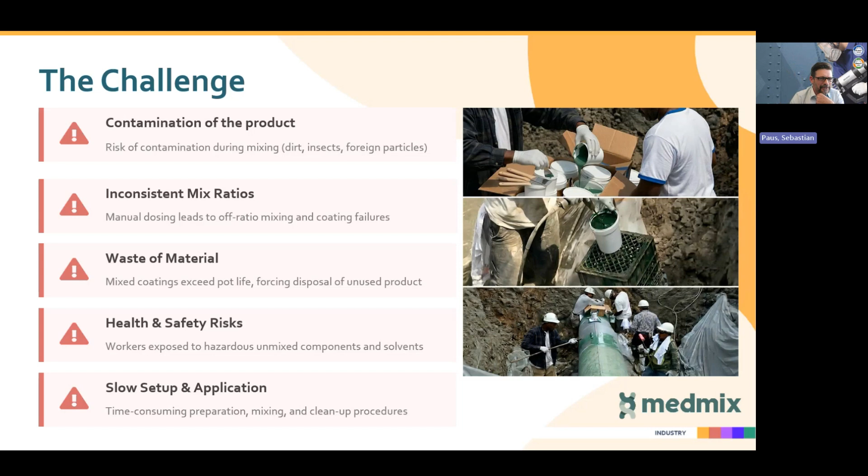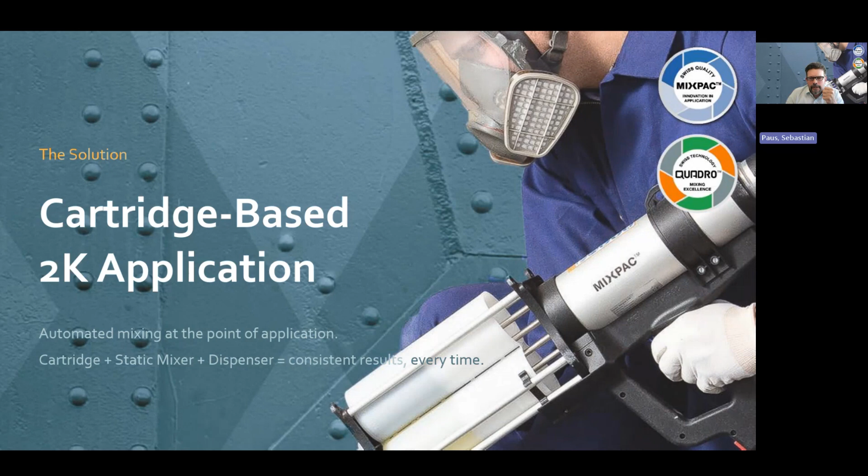So we faced the challenge, and now we are going to the cartridge-based two-component application systems that we provide. The first thing I would like to do is show you what the main applications in the pipeline industry are right now. So we've seen that weld joints are the number one application in the pipeline industry. Why is a weld joint such a predominant or such a good application for our system?

You can place the cartridges needed for the joint on the joint, access it only with a small vehicle with a compressor on it, spray the coating, and then go to the next joint. So here it is a perfect match for the system that we've generated.

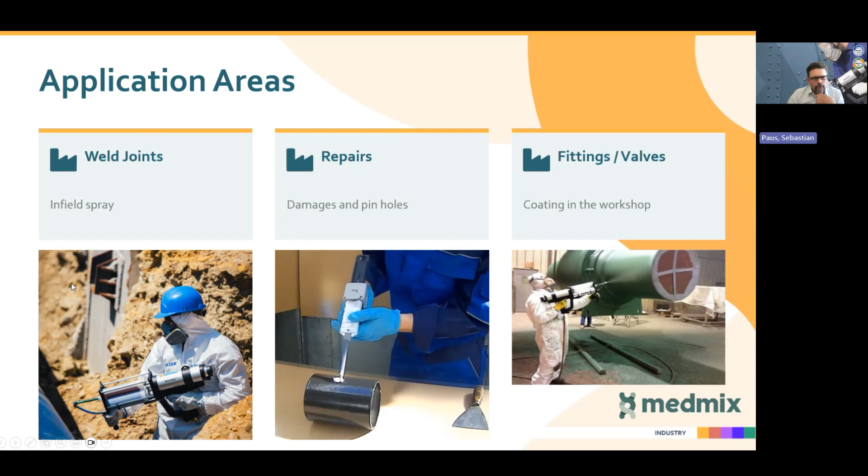Now, a short introduction, like a theoretical introduction into how our systems work. It is very, very well known in the world of adhesives, and I've seen a lot of people that are actually very, very well trained in adhesive on these kind of systems. In the coatings, it's not that well known. It's not a standard application system.

So literally what you do is you prepare your cartridge. In some cases, you need to shake it up. In some cases, you need to heat it, specifically in the pipeline business, as we are talking thick film coatings. And then you attach the mixer. You put the cartridge and the mixer into the dispenser. You need to purge the mixer to assure that the mix is uniform, and then you can start spraying.

After spraying, cartridge and mixer are contaminated with coatings. There's a little residual coating in the cartridge. This is going to be disposed. The main advantage of disposing this is you don't have the effort of cleaning anything.

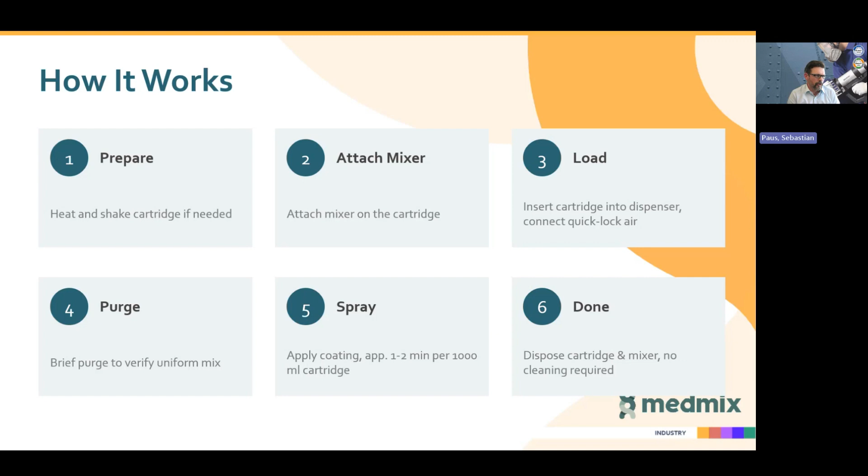So literally, after you are finished, you take the cartridge out of the dispenser, put it into the waste, and you are done. And this is also a very big advantage because you don't need to clean any tools that are being used throughout the process of mixing or application.

Now we're shortly looking at the main tools that we supply into the business, which is on the left-hand side, the spray dispenser. This is a handheld dispenser that holds all the ratios of cartridges available. It is like a standard spray gun. It has a dual stage trigger.

So if you pull the trigger in half, the atomization air will be activated. And if you pull the trigger full, the material flow starts. And this is a standard in spraying in the industry. This is why we've copied it, to give the applicator the feeling that he knows how the tool is operating.

Also, what is a great advantage is that you are handling the full device. You don't have a bigger unit that you need to transport to the location. You have your air hose. Obviously, you have the compressor, which is slightly bigger, but you have everything you need in your hand to spray. And this is very interesting.

For the pipeline, a lot of times you have to spray on top or below the pipe. For this specifically, we have mixers with 90-degree angles. Some customers really like these mixers for the top and the bottom of the pipeline. Some spray it with a straight one. I just wanted to point out the availability.

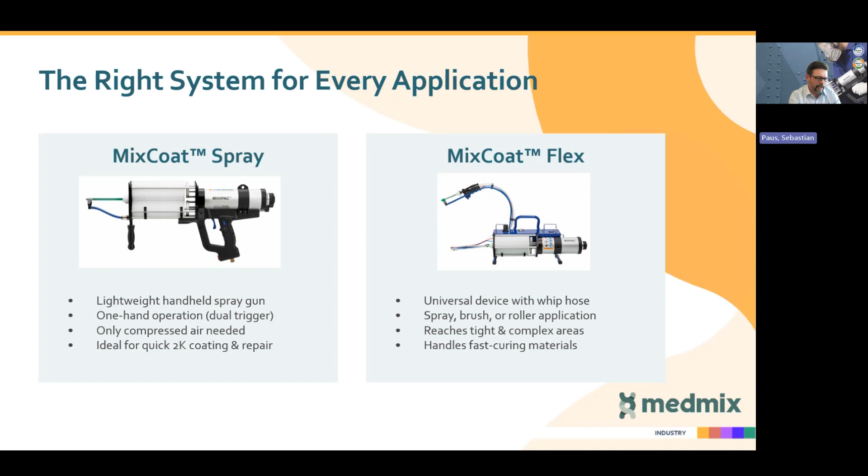Now we are going into the comparison. I made a small AI image on a cartridge and mixing in the field. So obviously you can see you have a very clean environment. You put the cartridge into the gun, you dispense, and you only have contact to ready mixed paint. And this is a crucial advantage.

You don't need to mix. You don't need to worry about mixing ratio or mixing quality. If the system is properly tested with the cartridges, it will work each and every time. The static mixer is one of the most reliable technical tools. So here, normally you don't find any difficulties in the use.

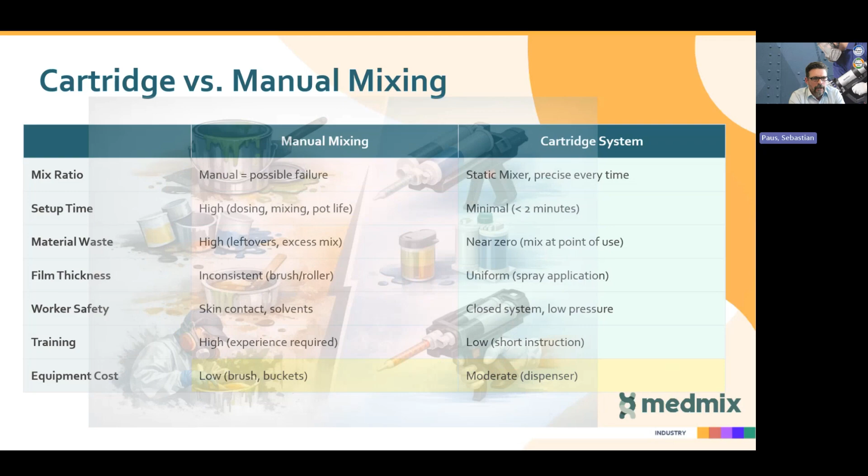Coming to the actual process, first of all, the mixing ratio. So if you pour one component into the other, it's always a manual process and there is a risk of failure. The mixing ratio is precise with the cartridge and the static mixer every time.

Setup time. So it's very easy to understand. You either put a cartridge into a dispenser, and on the other hand, you need to open a tin. You have to pre-mix the tin, the second one, pour the one into another. So we don't even have to think what is the quicker and better solution.

If you take a look at waste of materials, we've had that once already. Everything that is left over when pre-mixed is waste. And with a cartridge system, we mix at the point of application or the point of use. So there's a minimal waste, and this is the residual material inside of the mixer itself.

Film thicknesses. If you manually premix, you brush and roll the material on, it is much more difficult to achieve a consistent layer thickness when rolling or brushing. It is very uniform if you have a spray application. So here also the advantage is clearly on the cartridge side.

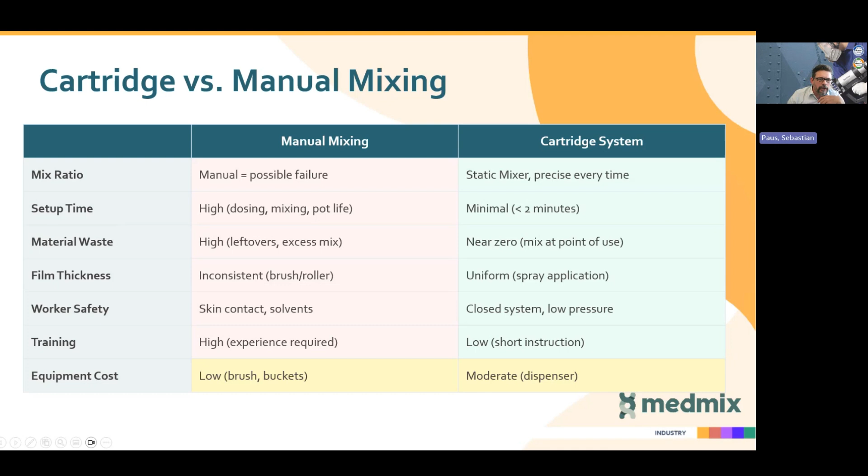Let's take a look at the reliability of the system. It's also very well known from the adhesive business and pretty much new in the coating business. A cartridge guarantees a correct mixing ratio with every single application, and the static mixer eliminates the manual dosing and mixing errors.

And as already said, spraying is one of the most reliable ways of generating a solid and consistent wet film thickness. Sorry, here it's dry film thickness. Sorry, that is wrong in the presentation. So we produce reproducible results, and the coating quality matches the factory coating of a standard pipeline.

So as you can see in the picture on the right-hand side, that was a movie that we've done in Spain. And here the target was to use the same coating on the weld joint as on the pipeline. And this is exactly what we've done. So here we found a very high interest of even the pipe manufacturer to use the same coating because they didn't want any complaints on insufficient corrosion protection.

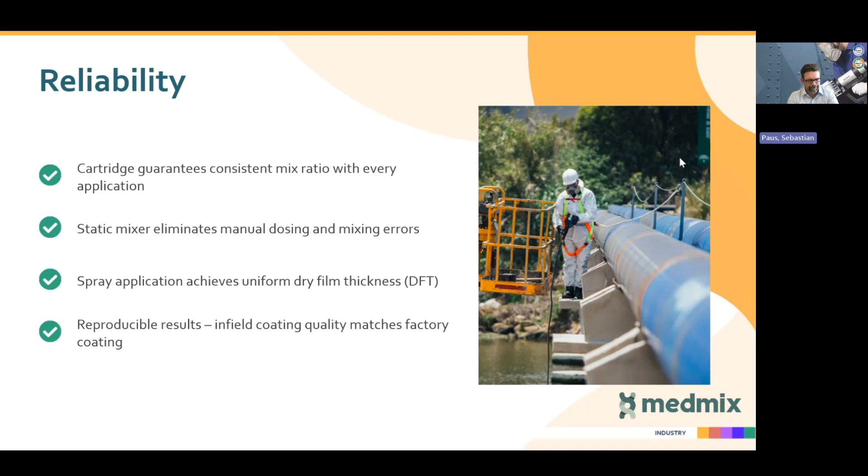Looking at costs. Here, the cost saving, we have to be pretty clear. This information that I'm showing here is based on a case study done in South Africa. So all labor costs and affiliated costs are based on wages and salary in South Africa, which is a low income country. So these percentages can shift significantly in other areas.

So we took a look at the reduction in labor hours that is not linked to cost. We saved 50% in this specific application. That was weld joints on a water pipeline for Rand Waterworks in Johannesburg. The cost savings per joint, although labor cost is fairly low, was 15 to 20%. Comparison here was to a wrap that was performed before using the liquid coatings, and material waste was literally none.

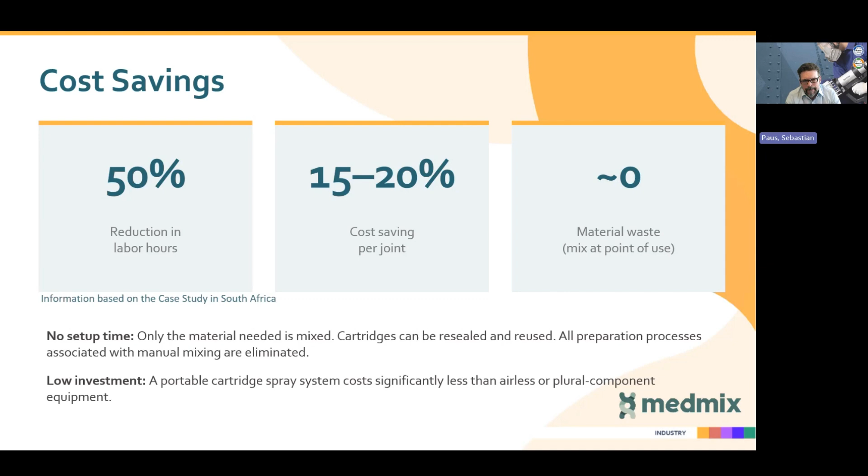So we go to health and safety right now. Also a very important topic in this market. We don't have any contact to skin. That's the third time I mention it because it's very important. We don't need any solvents, no volatile organic compounds at all if the coating doesn't have any VOC inside.

We use low pressure, so low risk of injuries by injection. And as the equipment is lightweight and fast, and we can finish the application fast, we reduce fatigue of the applicator.

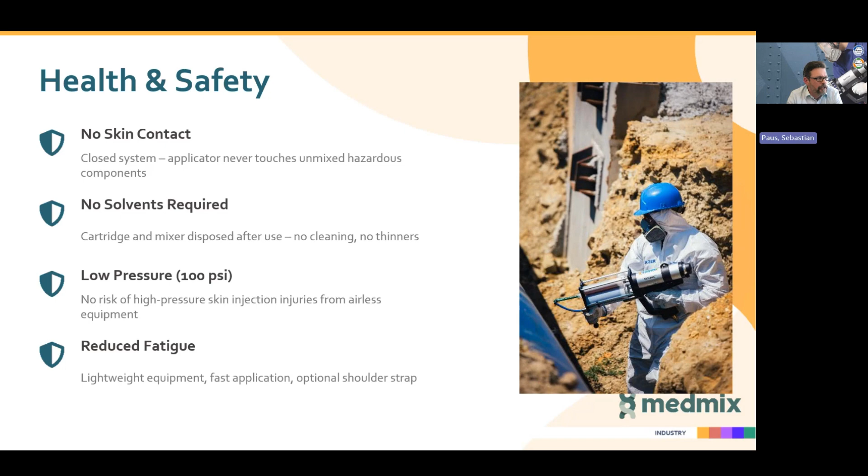Environmental benefits. Besides, the picture on the right-hand side was sprayed with our system in the course of the South African project. So this was the quality that we achieved on site using our system, just to give you a visual idea of the quality we've achieved on site.

We've seen that we have a lower overspray rate compared to high pressure applications or spray reactors. No solvents were used for cleaning, and the empty cartridges hold very little material, so it's very little hazardous waste that we need to dispose of or even pay for disposal.

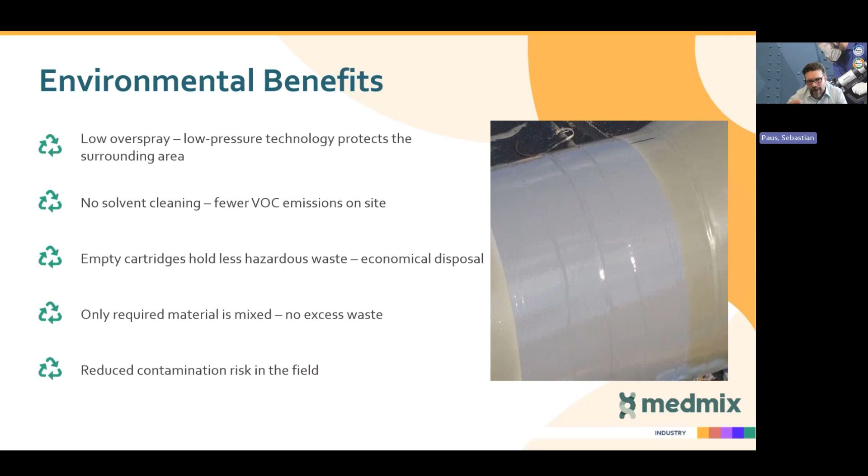Only the material that is required for the joint is mixed, and we don't have any pre-mixed material that is wasted because it's curing after we've applied the material to the joint. And what was a big topic in South Africa, we have a reduced contamination risk of the soil, of the water, of everything that surrounds the point of application.

In this case study, we also took a look at the processes and compared the two. So here, this is a very easy comparison. The presentation will be available afterwards. I really want to focus on the effective time for the application, and we are talking 3 to 5 versus 40 to 85 minutes here. And this is per application of one cartridge. So this might be a little bit longer when you need more than one cartridge for a joint.

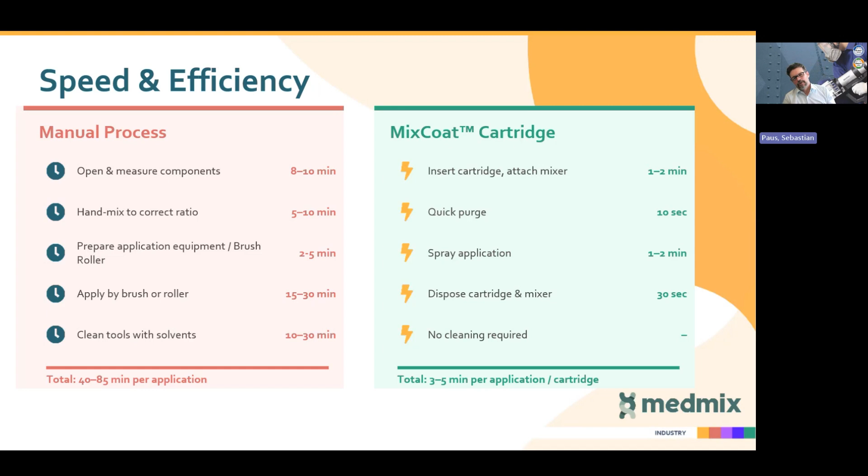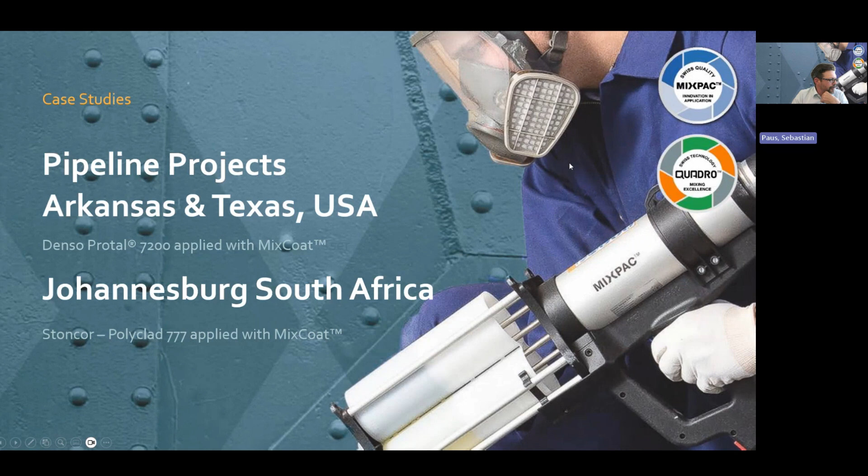We've been talking about the case studies a bit, so we are going to take a look into these a little bit, although we are already a bit late, so we have to speed up. We had one case study done in Arkansas and Texas with Denso USA, and we had a case study done with Stoncor in Johannesburg, South Africa. Materials are in the presentation, and I'll just give you a glance at what we've done.

So in the US, as I said, we had parts being coated in the workshops and on site. We also had weld joints being coated. And the key factor for Denso at the time was the uniform wet film thickness they apply on site, and with that, the uniform dry film thickness they've achieved when the joint or the part was ready for installation. And that is also something that we get from literally every company that uses the equipment.

No cleaning, less equipment, less waste. We are fast and mobile. And this is a key factor if you want to move from joint to joint, or if you're in a small workshop and you just need to coat a fitting that needs to be installed.

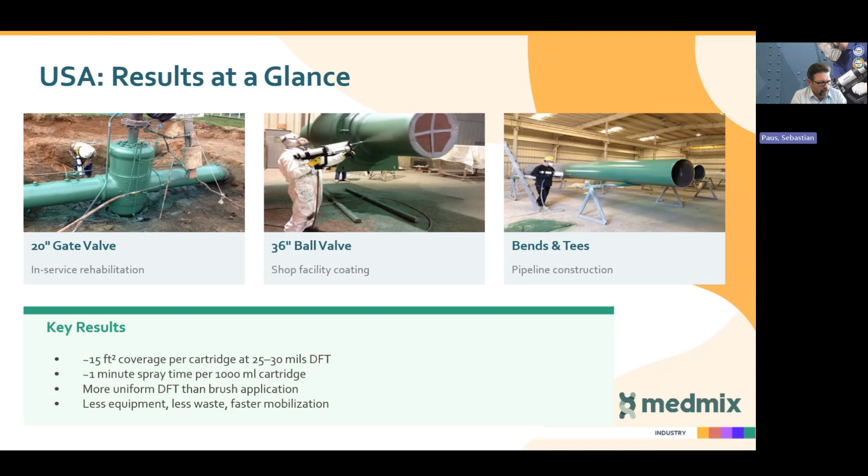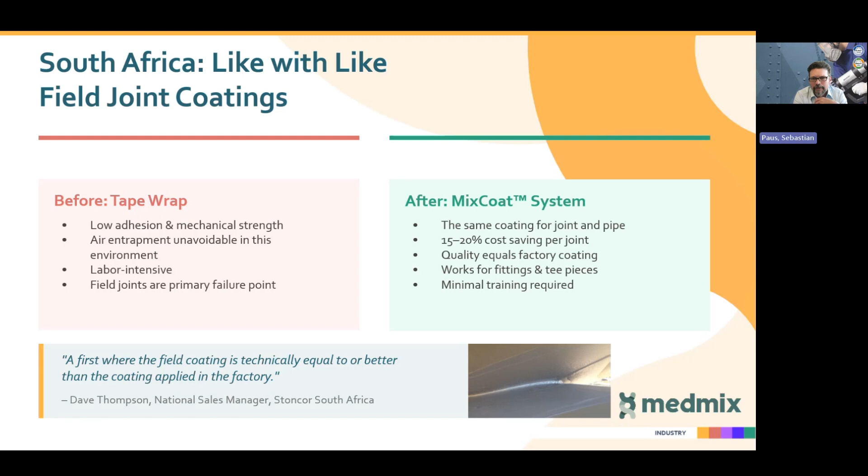And the thing that was really interesting is what Dave Thompson said after we finished the project. That was really a first, where we achieved the same or better coating quality in the field as the pipelines that came from the factory. Personally, I was present at the test. We did a better surface preparation in the field because we wanted to be very good, and that was the reason. But I agree, we did a very good job there, and the material worked really fine. So here you can see that even the paint manufacturers were very happy with the results we achieved in the field.

Small summary. We are reliable. We mix and dose correctly every time. That's the key message. We are cost effective: 50% less labor, 15 to 20% cost saving per joint based on a fairly low wage. And we are safe. We have a closed system. We don't have the risk of piercing of skins. We don't use any solvents to clean.

We are portable, lightweight, compact. The only energy we need is compressed air, and it works everywhere you can operate a compressor. We're eco-friendly, no solvent. Again, we have minimal waste, and no overspray is not a lie, but it's not quite true. But we have very little overspray with the system. And this is the key message in the end.

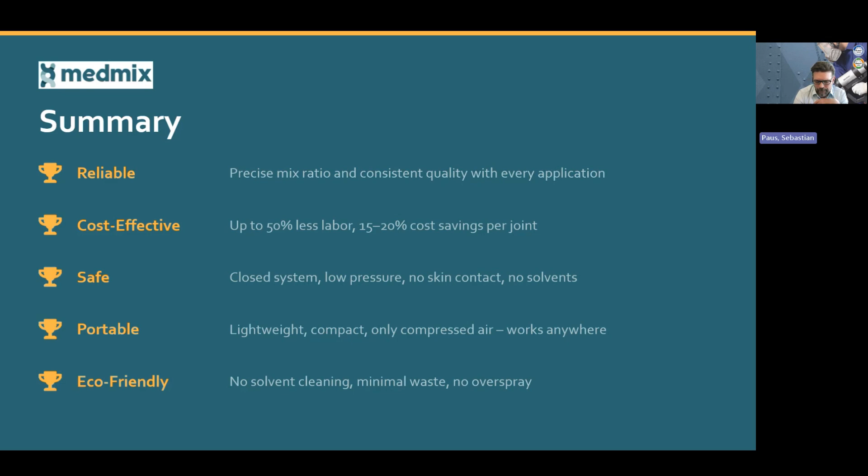One thing we need to make sure of is that the coating works with our system. This is why we would like to offer you to send us your material to find out whether it works with our cartridge system. We can do testing for you. We can schedule a demo on site with you. We will have you filling on site. First of all, of course, we need to find out whether the mixing ratio meets our cartridge offer. And then we can start a pilot project and find out if we can save some money out there.